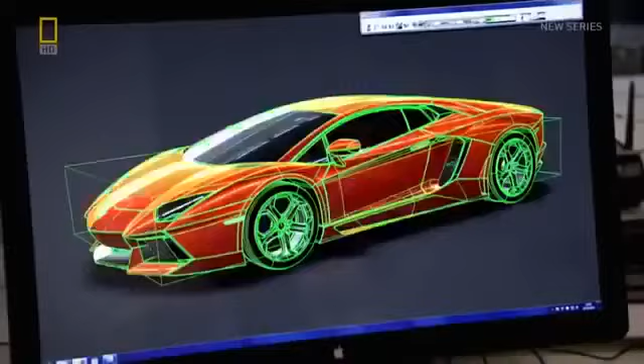But this will be no simple reworking of Lamborghini's old flagship models. Its engineers and designers are given the task of starting with a completely clean slate. And at its mega factory in northern Italy, the Lamborghini team has been stretched to its limits to fulfill those expectations. Now, as its latest creation takes to the road, it will be seen if the high-risk strategy has paid off.

Lamborghini has been responsible for some of the world's most iconic sports cars of the past half-century: the 350 GT, Miura, Countach, Diablo. The brand has achieved global recognition for its no-holds-barred approach to automotive engineering. Its extreme and powerful machines have placed it among the supercar manufacturing elite for decades.

But there's no room for complacency in this increasingly crowded marketplace. And a decade since the launch of their last flagship model, the Murcielago, it's time for Lamborghini to flex its muscles once again.

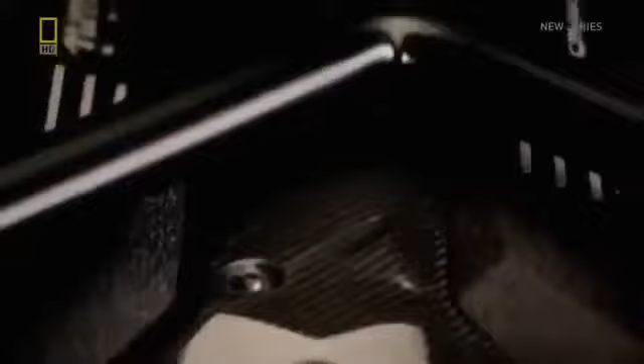Powered by Lamborghini's trademark V12 engine, the Aventador can reach speeds of up to 350 kilometers per hour, and it travels from 0 to 100 in under 3 seconds. It's their fastest car yet.

But remarkably, speed isn't even top of Lamborghini's priorities for the Aventador. Stefan Winkelmann has laid out his vision in a manifesto for the future of the supercar. Now in our days, it's much more important to speak about the power-to-weight ratio, so the balance between the power of the car and the weight of the car. And for us in the future, it's much more important to reduce the weight, because you get a better feeling, a better driving experience. The Aventador is the first test of this new blueprint.

And the National Geographic Channel has been given unique access at the Lamborghini factory to witness the creation of some of the car's first incarnations.

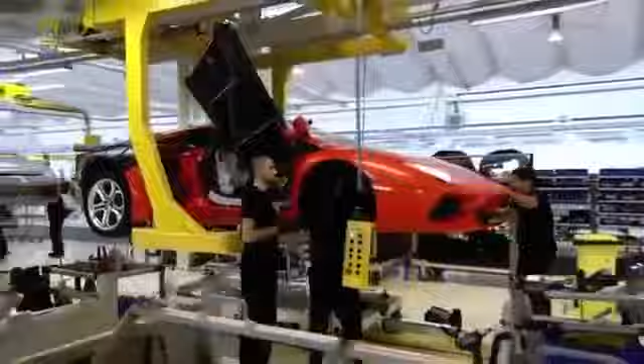This is Sant'Agata Bolognese, a typically picturesque town in the heart of Italy's Emilia-Romagna district, but it is in fact anything but typical, as it's home to Lamborghini, one of the world's most renowned supercar manufacturers. The factory is situated in the heart of what is known as Motor Valley in northern Italy.

Sant'Agata is intrinsically linked to Lamborghini's success, according to its head of communications, Raffaello Porro. Everybody in the world recognizes our cars come from Sant'Agata Bolognese. And so our factory is a kind of temple where people come, I can say it, pilgrimage, to visit where those cars come from.

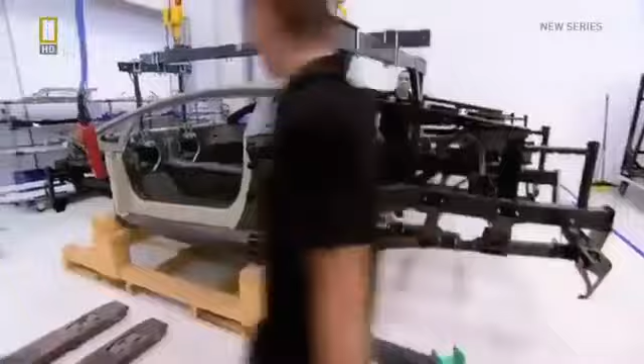The factory has seen many changes over the years, but its purpose has never wavered: to produce vehicles that challenge the status quo. And a largely local workforce is a vital part of that ethos.

They're coming from this region, not even from the region, they're coming from this part of Emilia. You know, we are in Emilia-Romagna, it's the Motor Valley, and this is in Emilia. So a lot of our people are not only living here, they were born here, they are here since generations, and a lot of workers we have in our factory, in our plant, are here at the second generation.

These people are Lamborghini's lifeblood. Over 400 individuals working with a singular aim: to produce high-end vehicles that consistently capture the public's imagination.

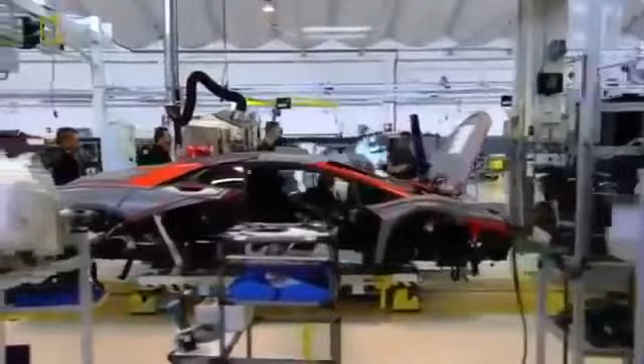In the last couple of decades, a new breed of creative and high-tech vehicle specialists has emerged. Companies such as Pagani and Koenigsegg have set their sights on toppling the most revered names in supercar engineering. Names like Lamborghini.

But it's unlikely that this Italian giant will let its mantle fall without putting up a fight, an attitude embodied in the company's emblem, the Raging Bull, partly inspired by the bravery of Spain's legendary fighting bulls, one of which showed such fearlessness in battle that it was awarded a trophy for its courage in 1993.

Its name was Aventador, and almost 20 years later its legacy lives on in Lamborghini's latest model. It's Aventador's battling spirit that Lamborghini's development team must channel.

In 2007, they're faced with the daunting task of creating a supercar that sets the standard for all others. Maurizio Reggiani, head of research and development, realizes that the only way of doing so is to take a step into the unknown.

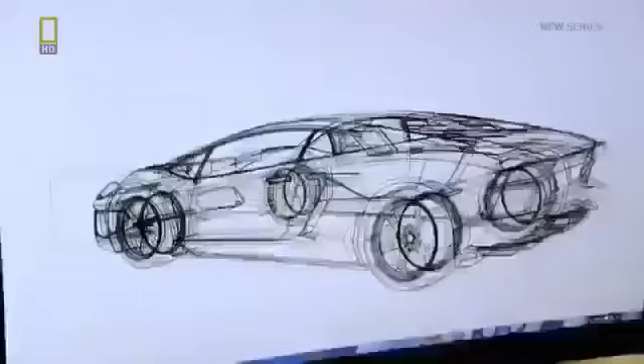To start from a completely clean slate is extremely high risk, and it's up to Reggiani to convince the board that it's the right thing to do.

This was one of the hardest things. Why? Because the project we were presenting had nothing in common with the old Murcielago, not with anything that existed in production at all. So it really meant beginning from scratch, with all the risks that come with that.

But the board decides the risk is worth taking. At the end of the day, they understood very well, because this is, again, about what Lamborghini is all about. Now, to recreate and to be always revolutionary in the approach.

The spirit of innovation is apparent in every fibre of the Aventador, as Lamborghini know that the fight to stay at the top won't be won through half measures.

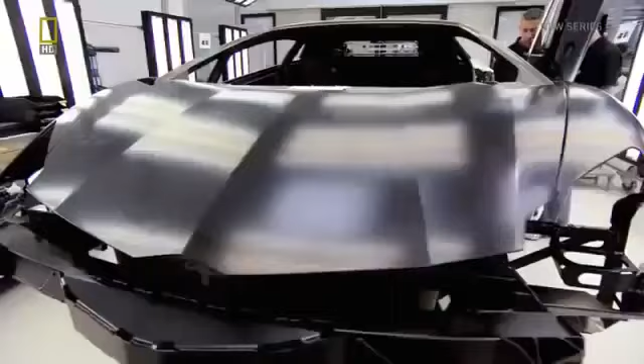And nowhere is that combative approach more apparent than in their focus on lightweight construction, which they've taken to new levels with an entirely new concept for road cars: a full carbon fibre monocoque.

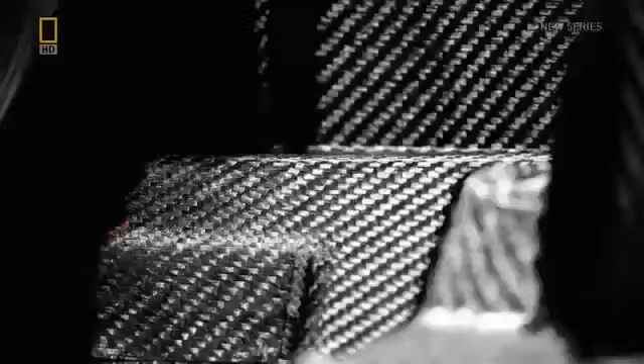These structures are common in racing cars, but the high cost of materials and laborious production methods have made them unavailable to supercar manufacturers, who've had to combine carbon fibre with cheaper, heavier elements, such as aluminium. That is, until now.

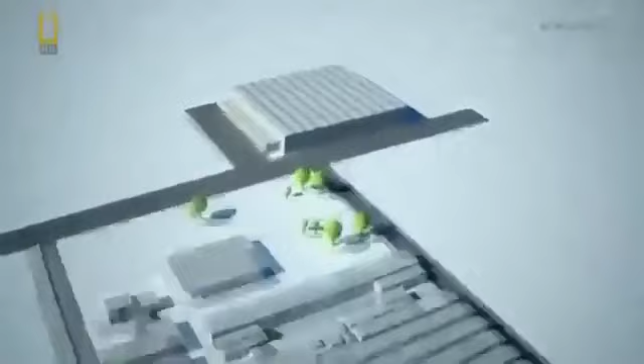The development team has devised a method that allows this race car technology to be mass-produced, but it requires a specialist facility that's up to the task. So in 2009, they built a whole new mega factory just down the road from the company headquarters, devoted to constructing the Aventador's unique carbon fibre body.

Which, being just 147.5 kilograms, helps make the Aventador significantly lighter than the Murcielago, considerably improving the all-important power-to-weight ratio, and in turn, the handling.

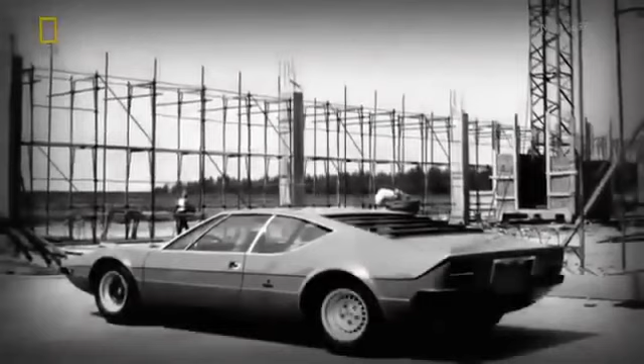Lamborghini hopes that this innovation will stave off the threat by the new wave of rival companies. Lamborghini knows well what it's like to be the cocky young upstart, vying to unsettle the established names, as that's how it began almost 50 years ago.

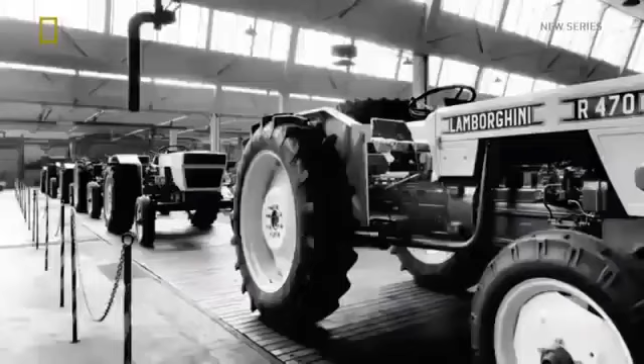The man upsetting the status quo back then was the company's founder, Ferruccio Lamborghini. He had made a fortune from a tractor manufacturing business and used some of his money to satisfy his love of sports cars.

According to Lamborghini legend, when he went to Ferrari to critique some of their parts, his views were dismissed. He got a negative response out of some requests he had and proposals to make a better car. And so he said, I will found my own company and I will create the best super sports cars ever.

He established Automobili Lamborghini in 1963, and for the next few years he toiled furiously to achieve his goal. The cars he created were well received, but it wasn't until the launch of the iconic Miura in 1966 that Lamborghini really made its mark.

The tractor maker had succeeded in breaking into the exclusive world of supercars with his bold new enterprise.

Almost 50 years later, despite having joined the ranks of well-established sports car manufacturers, the company still strives to be edgy and uncompromising, as demonstrated by its approach to the area it believes will define the future of sports car engineering: lightweight carbon fibre construction.

The company's relationship with carbon fibre goes back as early as the 1980s, when it created the Countach Evoluzione, a concept car which experimented with the use of composite materials.

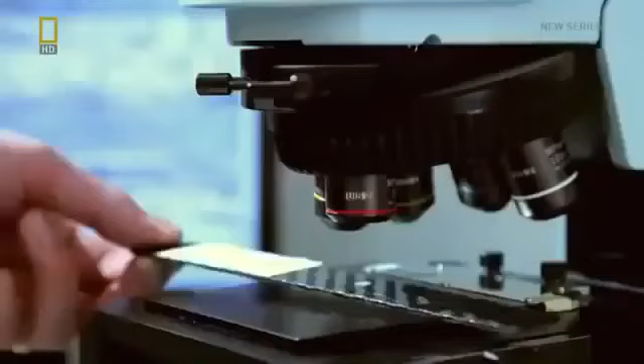It was dreamt up by the newly formed Composites Department, whose successor has made many inroads into research and development of lightweight composite materials. And discoveries made here mean that next door, the company has been able to construct its new carbon fibre production facility.

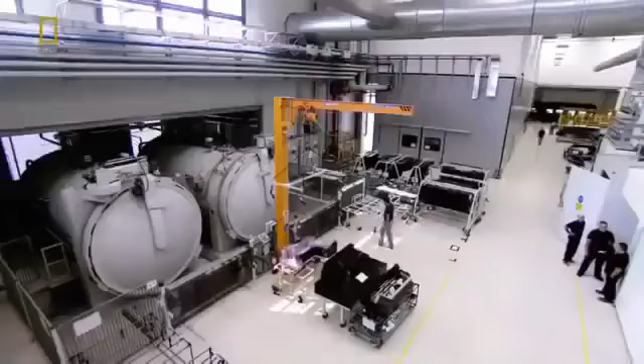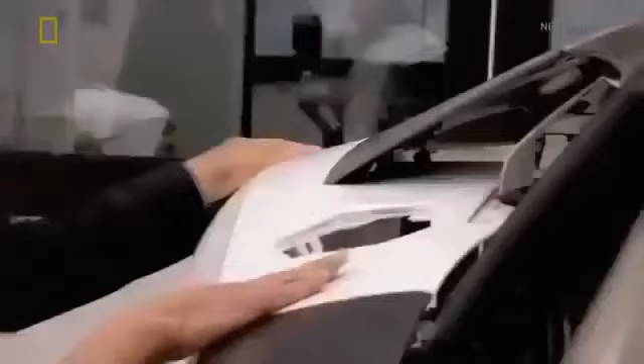The man given this task in 2009 is Ranieri Niccoli, Industrial Director, and he must devise it completely from scratch. So when we design and build this factory, we didn't have any automotive benchmark. We were the only one in the automotive business to build and run this kind of technology.

So they have to look elsewhere for inspiration. We look to other sectors, for example the aeronautic sector, then we adapt and modify their process to a Lamborghini production system in order to build our car.

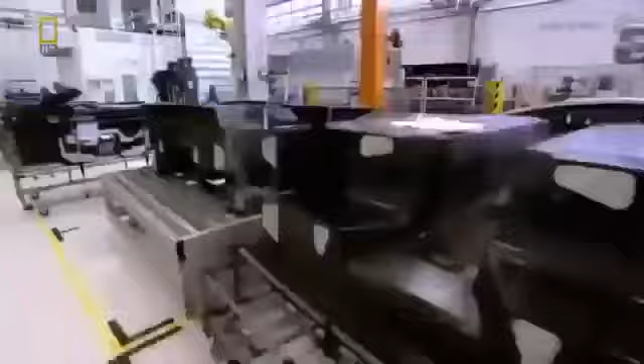The result is 500 square meters of new production space, known as the CFK, devoted entirely to sculpting the Aventador's super lightweight monocoque. Here, 146 carbon fiber specialists toil day and night to create 4 complete monocoques every 24 hours.

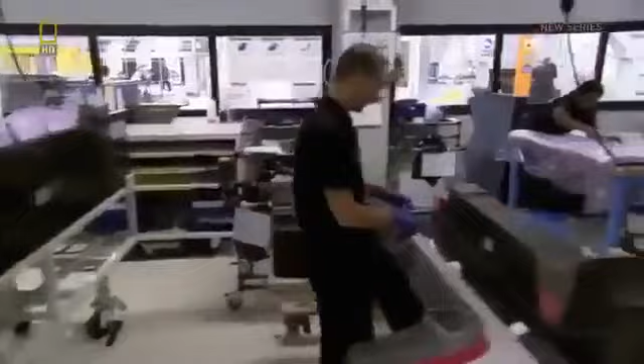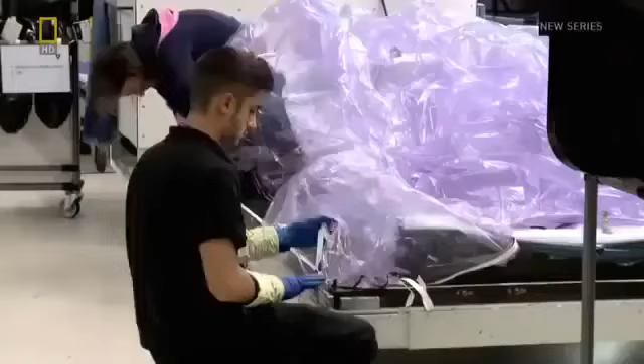To achieve this target, engineers have developed a unique production system. All materials are first cut by an automated machine before being sent for preparation. The material is placed into molds and laminated in a vacuum bagging process which forces the layers into shape, before being cured in a large pressurized oven known as an autoclave.

Meanwhile, the production of other parts of the monocoque is underway, as operators fine-tune and cut more layers of carbon fiber with the assistance of precision lasers. A special oven is used to inject resin into the carbon fiber mats, which transforms them from soft sheets of cloth-like material to a strong, rigid structure.

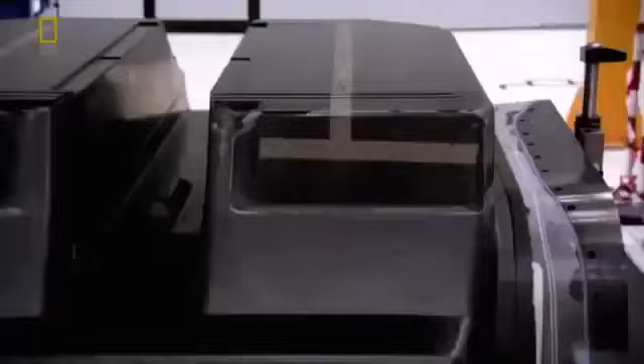After all these processes are over, the 2 key sections are finally recognizable: the base section, known as the tub, and the roof. They're placed in an automated machine, which drills them with holes allowing for attachments to be made later.

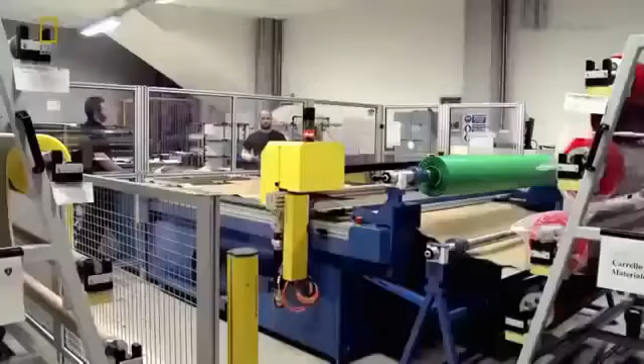Throughout the factory, computer-controlled machines share tasks with human specialists, a partnership that's integral to the Lamborghini production process. The main priority of our plant was to follow the Lamborghini production system, so with a high degree of craftsmanship, high degree of skill, people, combined with technology and an automatization process. This was the main challenge that you can also see in our plant.

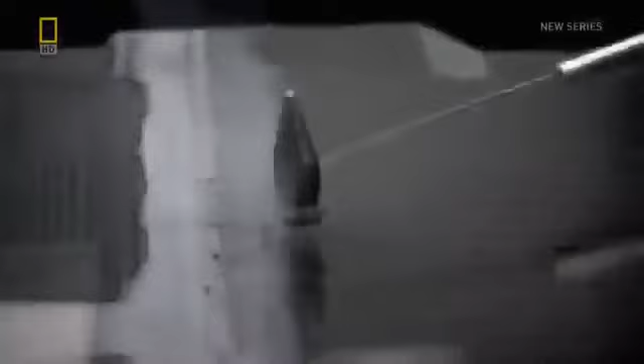Aeronautic-inspired engineering is ingrained in many aspects of the Lamborghini CFK production process, such as this stage, known as the Harmony Hammer Test. In this quality control test, an operator strikes the monocoque section with a specially designed hammer and allows it to vibrate, listening out for areas where air might be trapped in the carbon fiber shell.

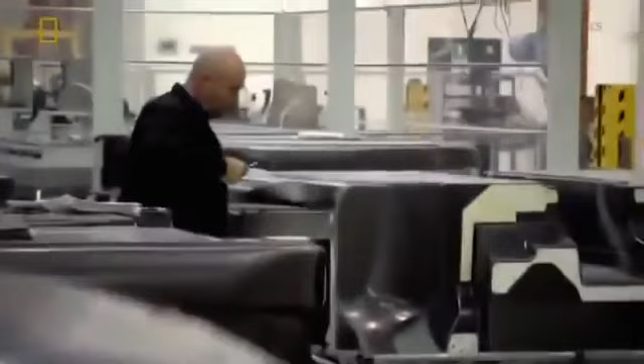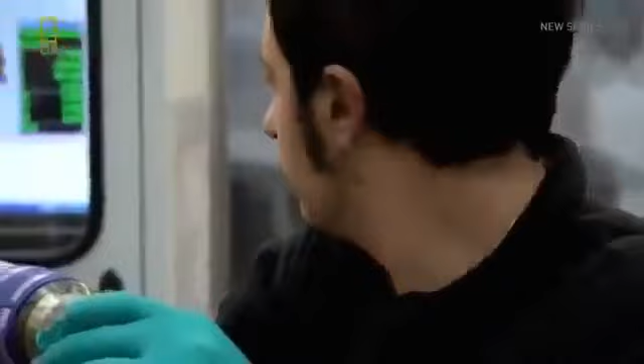Once checked, the parts are ready for their union as the tub and roof are glued together, turning the monocoque into a single entity. It's essential that the 2 parts of the monocoque are exactly aligned, so workers use a robotic arm with a 3D laser attachment to check that the sections have been coupled correctly.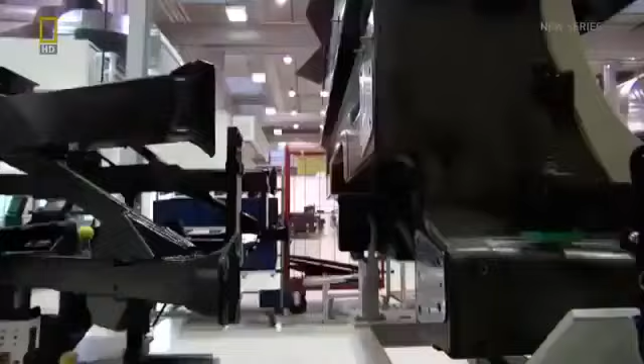Once the correct dimensions are confirmed, metal sections are manually attached to the monocoque and the body is complete. Then it's into a light tunnel where surfaces are quality checked to ensure they're in pristine condition before the Aventador's body is signed off for release.

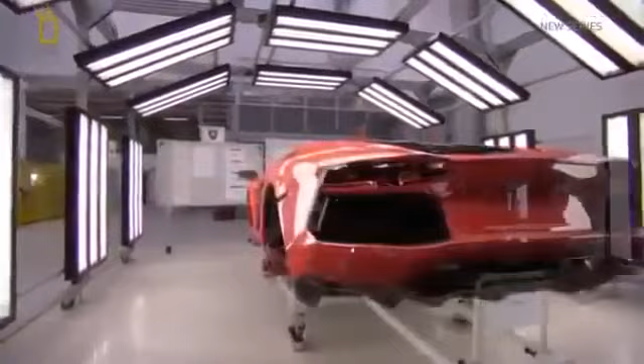As the body is ready to leave the carbon fiber plant, it's possible for the first time to see the Aventador's unique geometry taking shape. This extreme design is one of the most recognizable aspects of the Lamborghini DNA, and it's a tradition maintained and pushed forward here, at Lamborghini's Design Center, or Centro Stile.

The generational leap required of the Aventador does not stop with its engineering capabilities. The look of the car is integral to its ambition.

The design of Lamborghini always has to be revolutionary. Yes, you have to understand, if you see a car in front of you, this can only be a Lamborghini, even if you don't know the model. So it's about creating something new, but recognizable at the same time.

The job of the design team and its chief, Filippo Perini, is made even tougher during the earliest phase of the Aventador's development, when the board forces them to compete with outside companies to earn the right to design the new model. And at one point, victory comes close to slipping through their fingers.

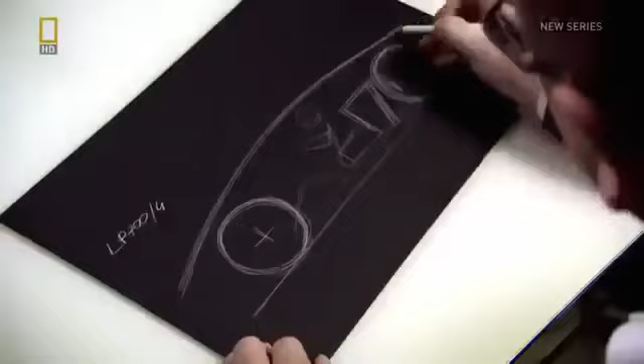What emerges from this balance is a car whose style is intimately linked with its role as a high-performance vehicle. And its sources of inspiration are many, drawn from one of the team's most important tools, the brainstorming board.

So we take it from nature, sport, technology, lifestyle, elements that we can integrate, and in that way, brainstorming gives us many design options.

Details like the ignition button and TFT screen seem to come direct from a jet fighter cockpit. And the world of aeronautics influences a lot of other style choices besides.

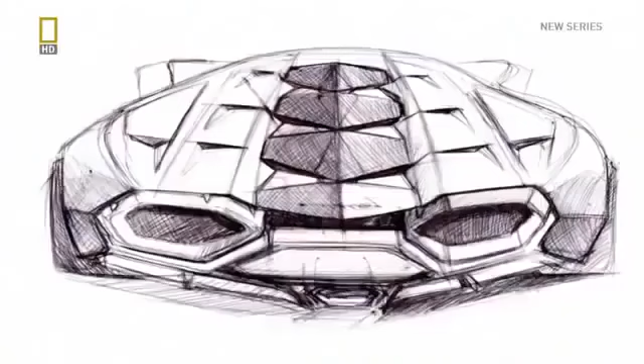We understood that we had to draw inspiration from other worlds, and nothing was better than nature as a reference point. So we took some images of insects that were great inspiration for the roof of the vehicle, with this shape. It's very linear, very sculpted.

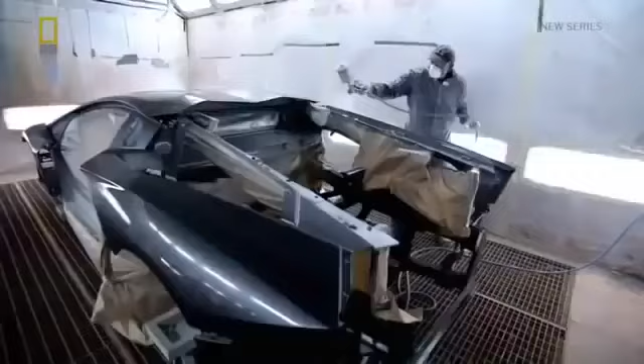After the CFK, it's taken away to be given one of its most important characteristics: its colour.

Here at the paint shop, it's lavished with the kind of attention that most cars could only dream of. One of 13 colours are hand-sprayed over every part of the bodywork.

27 pieces are given individual attention by a specialist, who covers them with 8 litres of paint. The Aventador, with its extreme lines, requires more man-hours than any other Lamborghini in the past.

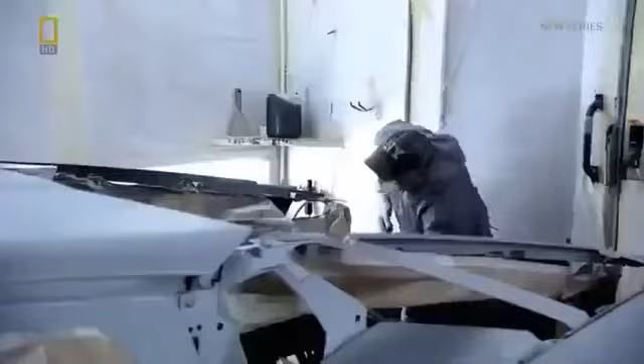And of course, every phase is carried out manually, as only human analysis and dexterity can ensure that each surface is covered with exactly the right amount of paint.

In total, 200 man-hours are spent on every single Aventador while at the paint shop. 3 whole days are spent on polishing alone. After being carefully sanded, the Aventador is repeatedly buffed with special materials.

After that, it's sent for another quality check in a light tunnel. For 2 hours, an inspector walks around the bodywork, checking for colour perfection. If there's any inconsistency, the offending section will be sent back to be repainted.

Under-polished areas are also marked out for extra attention. These hundreds of hours of devotion end when the exacting standards of the inspector are met, and the car is released for the next phase of production, the assembly line.

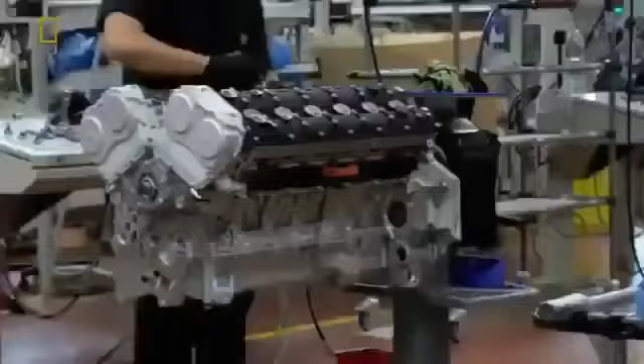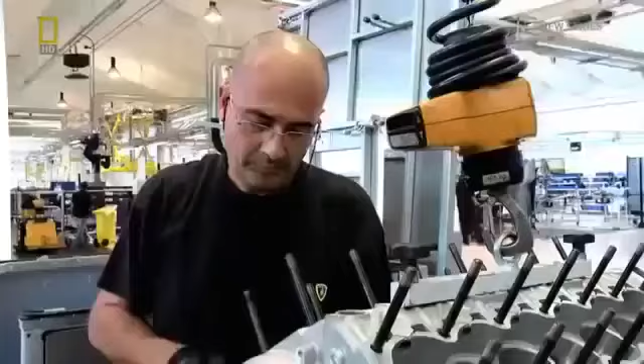The assembly line for the Aventador lies just meters from the original site of the Lamborghini factory, built almost half a century ago. Back then, its founder, Ferruccio Lamborghini, was known for his hands-on approach, frequently seen on the factory floor, directing operations. He focused on the skill of the mechanic as being key to the success of the product, and that attitude still permeates the site today.

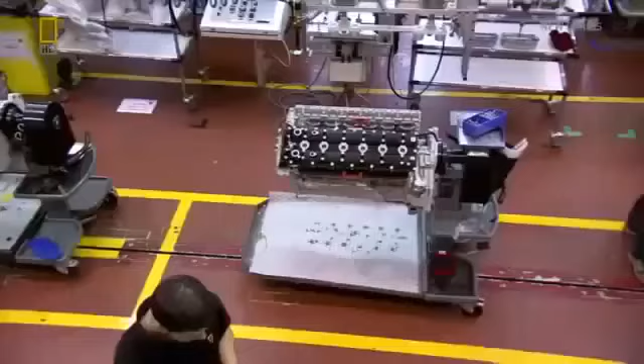Here, 50 workers spread over 11 workstations are responsible for the task of assembling Lamborghini's latest model. The man in charge of making sure things run smoothly is production manager Andrea Costantini. He sees his highly trained workforce as a direct link with the roots of the company.

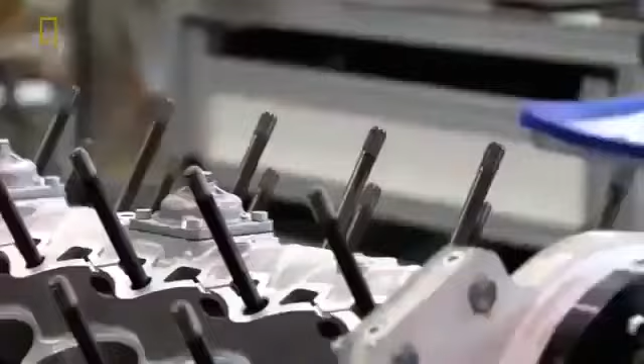In this case, the workers are the most trained. We take these guys directly from the best schools of mechanics in Emilia-Romagna, here in the surroundings of Lamborghini, and we train them for more than 2 years to allow them to be really the best experts on mechanics and engines. So everything is done manually, still like we did since 1963, since when Mr. Ferruccio Lamborghini, the owner of Lamborghini, started.

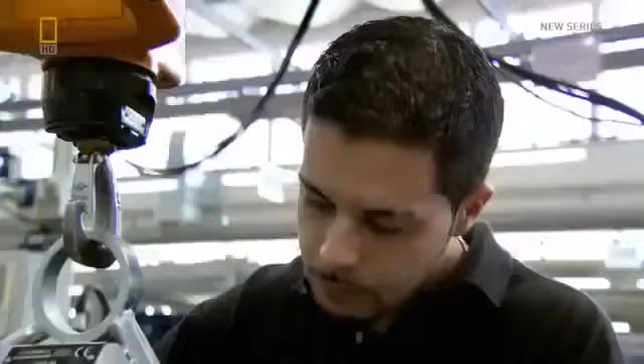In an age when machines dominate production in almost every field of manufacturing, loyalty to the art of skilled manual labor is not often seen. But here it's believed that when it comes to reliability and precision, humans still have the edge over machines.

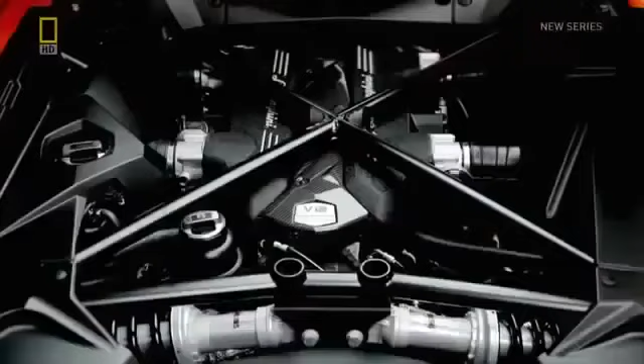And nowhere more so than in the engine assembly station. For this is where the heart of the Aventador is put together. The Lamborghini V12.

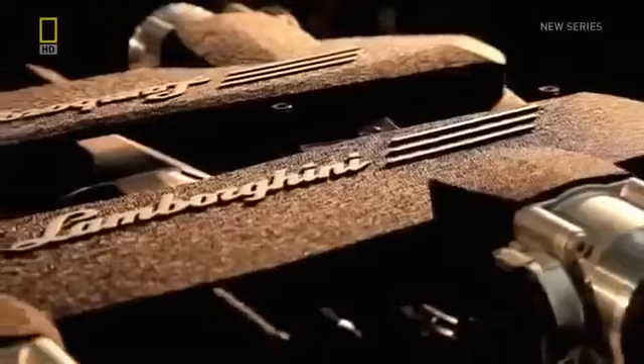At a time when many sports car manufacturers are shying away from using the 12-cylinder engine, Lamborghini is resolute. The V12 always has and always will provide the power for their flagship models.

The V12 for Lamborghini is part of our DNA. Everything for us is rooted in our history, which started with the 12-cylinder engine.

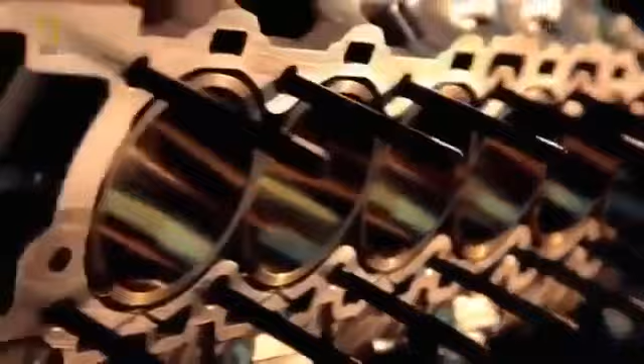With 6.5 litres of displacement and 700 horsepower, the Aventador's V12 is about as gutsy as it gets. But as with everything else, it's had to move with the times.

Lightweight, again, is the order of the day. And despite the fact that this engine is more powerful than the Murcielago's, it weighs less, just 235 kilograms, by using aluminium silicon alloy on components such as the crankcase.

The main purpose of the V12 is to power the Aventador, but when linked with the car's exhaust system, it takes on another significant role: creator of the mighty Lamborghini orchestra.

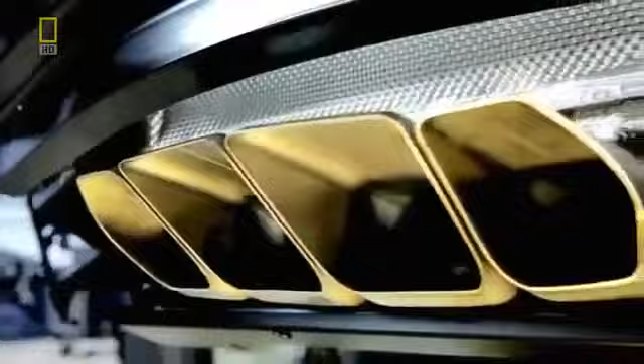The V12 motor represents what for us is the sound, the music of the car, the way in which it's presented to the public, the way she makes herself heard and announces her arrival. To achieve this, we invest a great deal of time in simulations. We simulate the sounds that we can have, and then we experiment first in the lab and then on the vehicle itself.

This 12-cylinder symphony has a full range, from a moderate rumble through the town at low revs to the screaming crescendo of maxed-out gear shifts.

While the V12 is being assembled, the body of the Aventador arrives on the assembly line, ready for conversion from an empty shell into a fully functioning supercar. As the company's latest foray in a highly competitive market, the Aventador needs a production process with efficiency to match.

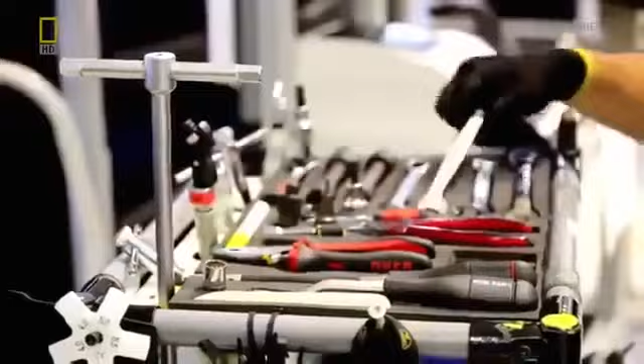The drive for improved efficiency was for sure coming from the market, from our competitors. We have always to be the best, to be the number one in terms of product, in terms of performance, but also in terms of quality. So to become and to stay number one, we have always to have a huge increase of efficiency, a huge increase of quality in the assembly line and in all the processes inside the factory.

The company's output of luxury vehicles is a mere fraction of what the large-scale manufacturers produce for the mass market, with around 800 Aventadors due to be created in the first year. But that doesn't mean the factory can't be run to similarly exacting standards of efficiency as the largest groups.

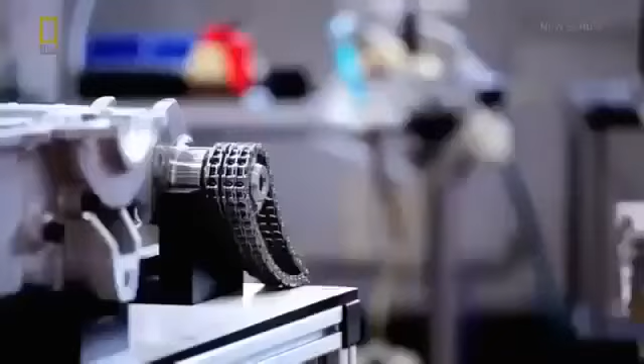And that means that workers have just 1 hour and 40 minutes to carry out a whole range of highly meticulous tasks. If they take too long, the whole assembly line will stall, targets will be missed, and costs will mount up.

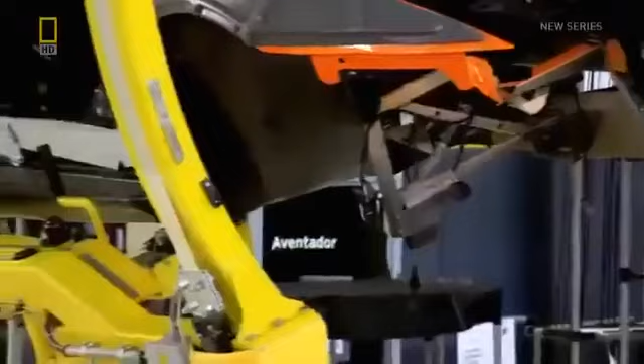The countdown starts here at the first station. Work is carried out on the underbody and front differential by lifting and rotating the vehicle to give the mechanics easy access.

Before being readied for what is arguably the most significant stage in the Aventador's production, the insertion of the colossal V12 powertrain into the car's chassis.

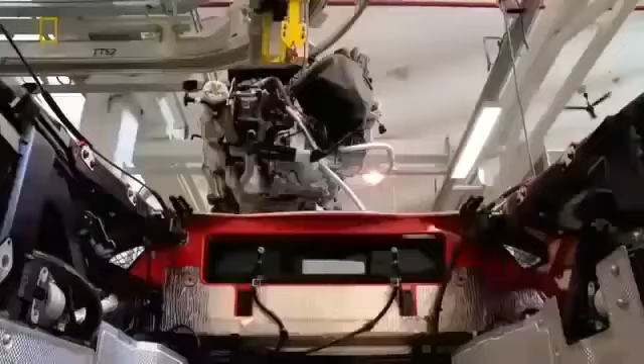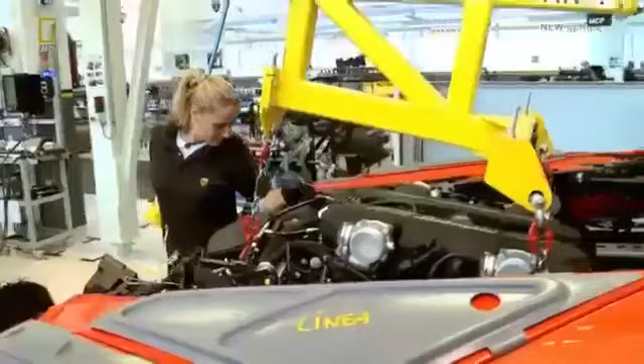Here we are in the most critical assembly station of the Aventador assembly line. Here we have the assembly of the engine, the heart of the car, basically inside the body. We call it the marriage between the car and engine. This marriage of elements is when the development team's work of the past 4 years comes together, where design and engineering combine.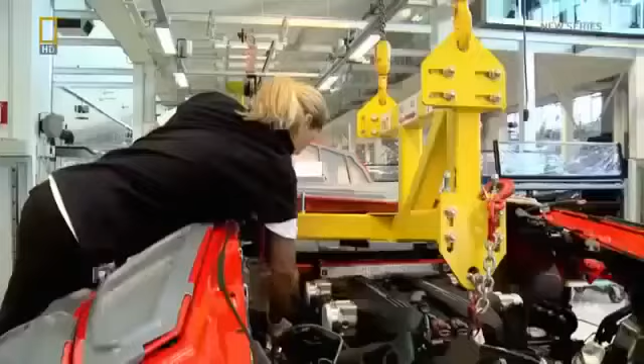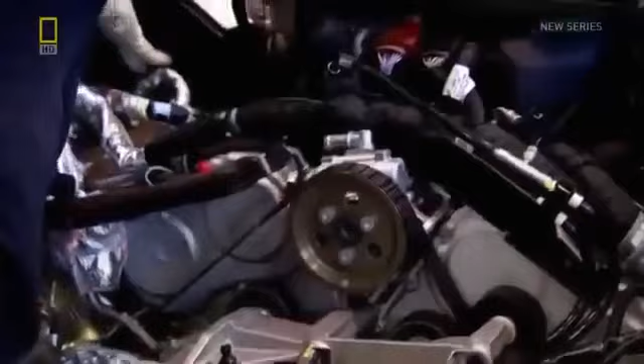Here, as with all other phases of production, the specialists of each station take full responsibility for their section. You can see the workers check each and every single connection to be sure each phase was done correctly. The risk is that the car may not work properly afterward during the road test, which could be a big problem for a customer using it. As you can see, this is absolutely not done with robots or other automatics, but is done manually.

Step by step, the car is taking shape, being molded from an empty shell into the fully formed supercar that will leave the factory.

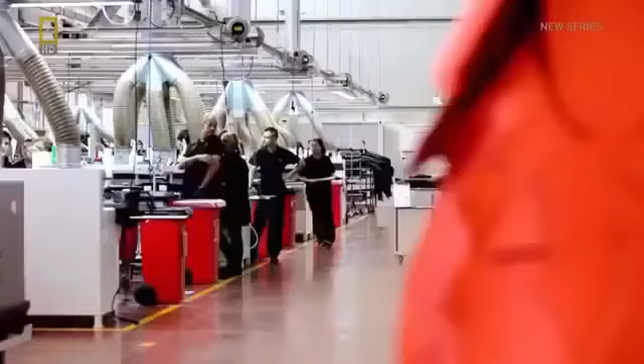And while the assembly line is in full flow, next door, the second critical aspect of the Aventador is being prepared: the interior. It's in this sector of the factory that a customer's individual preferences for the way their car looks can really be indulged.

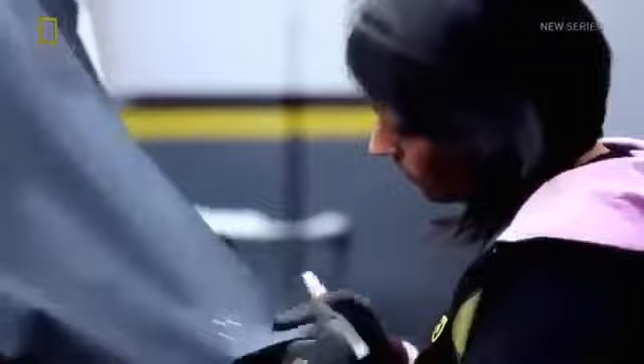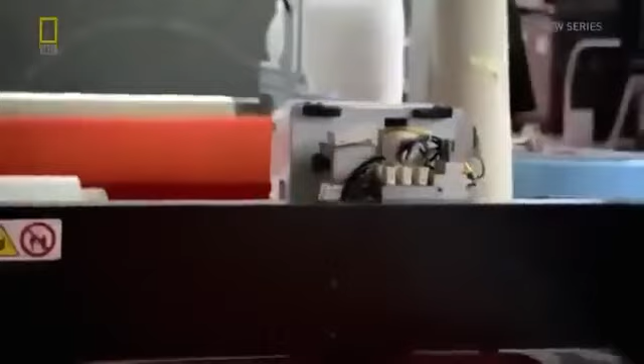About 100 square meters of leather hide in 9 different colors arrives each day. Attention to detail is essential to pass the stringent quality control checks. A leather specialist looks for minor imperfections in the hides and marks them wherever found. An automated machine recognizes the marks and cuts around imperfections, leaving only pristine material for the Aventador's interior. The leather is then taken to specialists with 3 years of training to be stitched and glued onto the various parts that make up the Aventador's interior.

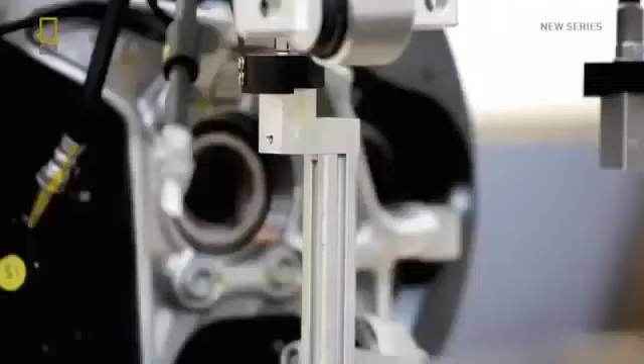Back on the assembly line, one of the Aventador's most important pieces of kit is ready. This simple-looking item is the suspension, but its apparent simplicity belies the creativity that goes into its engineering. The Aventador uses a pushrod suspension system direct from the world of Formula One race cars. It works by keeping wheel control and damper elements separate. By keeping the damper elements inboard, the pushrod system allows the wheels to maintain maximum contact with the road when going round bends, massively improving the handling on corners. A must for a car that can hit speeds of up to 350 kilometers per hour.

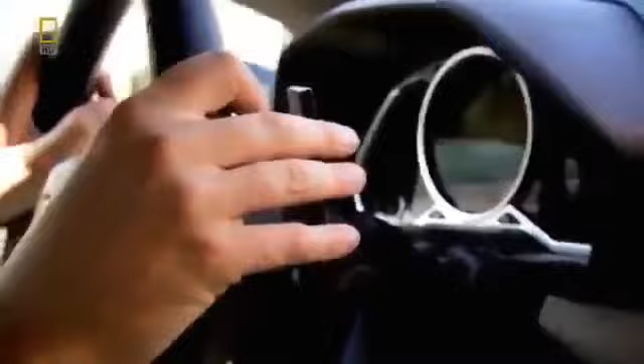Another key feature of the Aventador's engineering, which has a dramatic effect on handling and the feel of the vehicle, is the transmission. The Aventador's transmission is operated by 2 shift paddles behind the steering wheel. But it's what's happening away from the eye that's most remarkable.

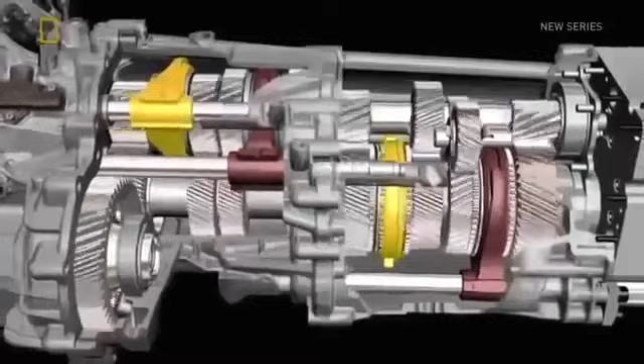The Lamborghini patented independent shifting rod transmission. This technology allows the shifting process to run virtually in parallel. While one shifting rod is disengaging one gear, the second shifting rod can already engage the next gear, creating a shifting time of just 50 milliseconds. Not far off from Formula One transmission times, which average around 30 milliseconds.

Such technological innovations are only made possible by extensive testing of the vehicle during the development phase. And possibly the most critical moment for the engineers is when the prototype model takes to the track to be put through its paces for the first time. For the Aventador, this happens back in 2008.

Then we found ourselves at the first track run of the Aventador, which generated an indescribable emotion. At night, on the Nardo track, a small group of people saw a creature move for the first time, something that had needed years and months, nearly a year and a half, before it was able to move. And the perception, after these first laps, based on what our test drivers told us, was that we'd created something that really was the new landmark for super sports vehicles.

The man behind the wheel of that prototype Aventador was Lamborghini's chief test driver, Giorgio Sanna. He's been a key member of the Lamborghini development team since 2001. A dream job for many, but the thrill of driving prototype supercars comes with certain pressures.

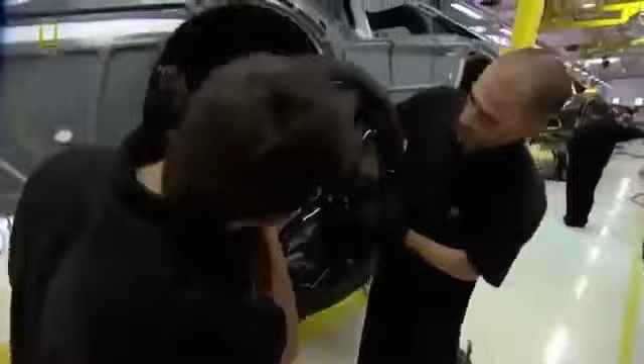The Aventador is reaching the final stages of the assembly line, and mechanics work quickly to get it ready for the next phase of production.

Here we are in the last workstation of the Aventador assembly line. After four days of assembly, over 50 workers in the line and more than 60 in the saddlery and the engine have assembled our cars.

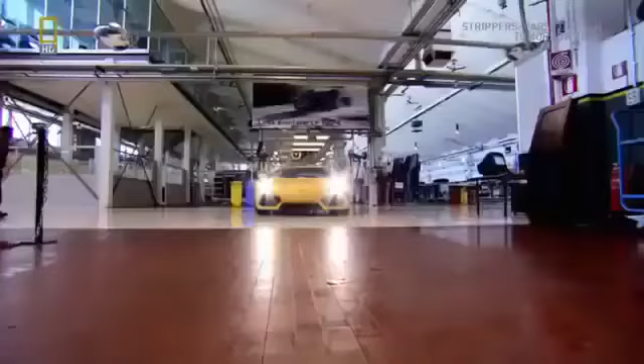As important as the assembly process itself is the series of quality control checks that the car must undergo once it's complete. Any minor imperfection could impact on the car's performance, and its safety elements in particular must be rigorously tested.

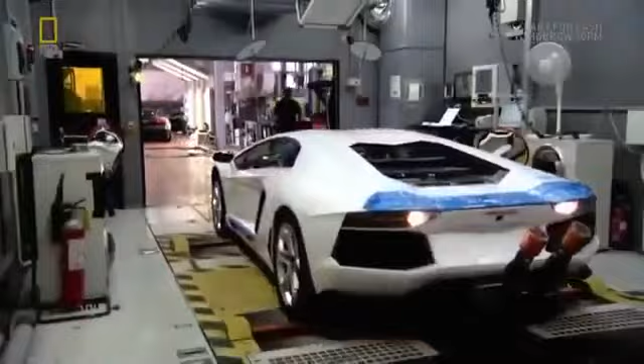The brakes are checked in a room where the car is driven at speeds of up to 140 kilometers an hour on a rolling road.

The Aventador's carbon ceramic brakes can take it from 100 kilometers per hour to a complete standstill within 30 meters. And in theory, the Aventador is capable of going from 0 to 100 and back to 0 in less than 4 seconds.

Data from the anti-lock brake system is transmitted wirelessly to two dishes, then into a computer mainframe for analysis.

The final task of the factory workers is to scrutinize the car in a light tunnel to ensure that aesthetic standards haven't been affected during the assembly process.

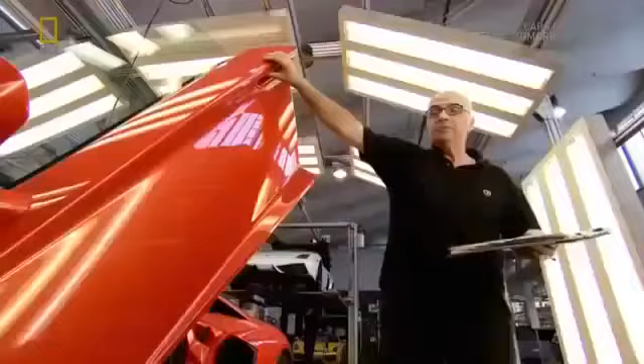But before it can be shipped to whichever global location it's destined for, each Aventador must undergo one final phase: the all-important road test.

Every car is given its own test drive around the local area. They're put through their paces to check that their complex engineering is absolutely in tune. And it's here for the first time that the cars are enjoyed as they were intended to be.

Only once the test driver is satisfied that all aspects of the Aventador have been properly configured will he sign it off for release to the outside world.

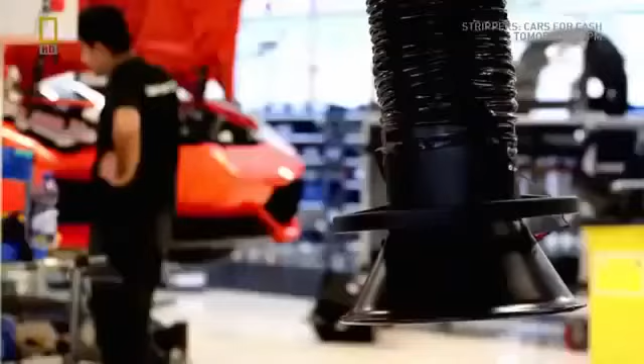The Aventador has come a long way since the brief was first given for its creation in 2007. Years of struggle from designers, engineers and mechanics have culminated in a vehicle which looks likely to remain as Lamborghini's flagship model for some time to come. The risk of starting completely from scratch has paid off.

And with the new era underway, complete examples of the Aventador are rolling off the assembly line at a rate of 20 each week.

But for Lamborghini, the challenge does not end here. As the company celebrates its 50th anniversary in 2013, it will be thinking of new ways in which it can push the boundaries of automotive engineering. Stephan Winkelmann suggests that a different era might be around the corner.

Our two-model strategy for the future will not be enough, so we decided to step into a third model. It will be a Lamborghini which you can be able to drive every day, so a very usable Lamborghini, but it will always have the DNA of the true Lamborghinis inside.

A Lamborghini for everyday use may be on its way. But until then, the Italian supercar manufacturer will focus all its efforts on producing vehicles which aim to keep them ahead of the competition. And right now, the car leading that charge is the Aventador.